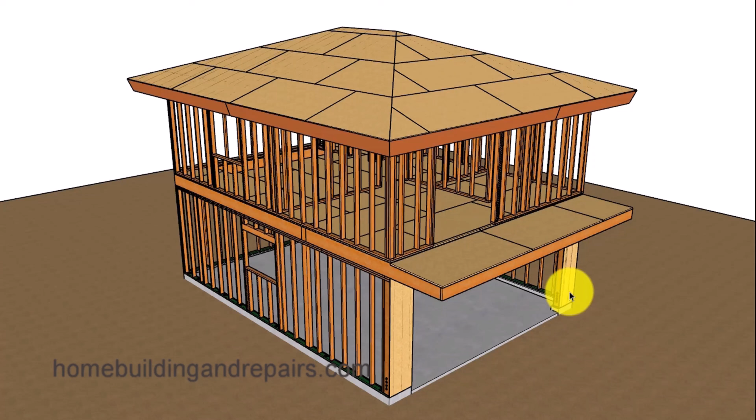I'm also going to provide a couple of examples for installing shear walls. That would be a common thing to do on the front of a garage, especially when you have a 20-foot wide building and a 16-foot garage door opening.

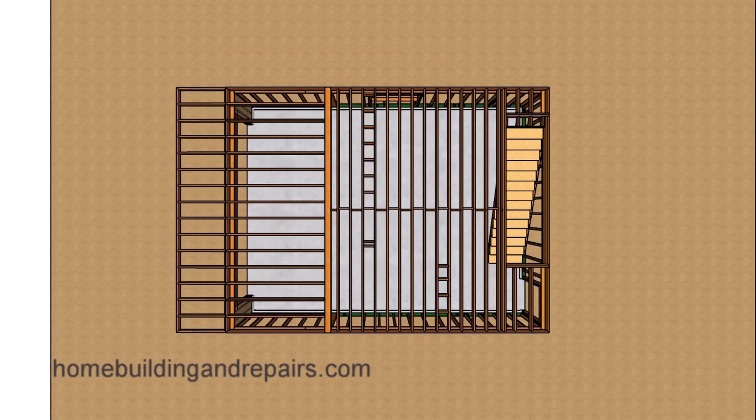Let's go ahead and quickly take this building apart. Get rid of the roof, ceiling joists, walls, floor sheathing, and then the joist, so that we can take a look at the foundation and get a better idea at how the structural shear panel will work.

In this video, I went ahead and widened the wall here to make it a 2x6 wall so that I could install some 4x6 on each side, along with some large hold downs.

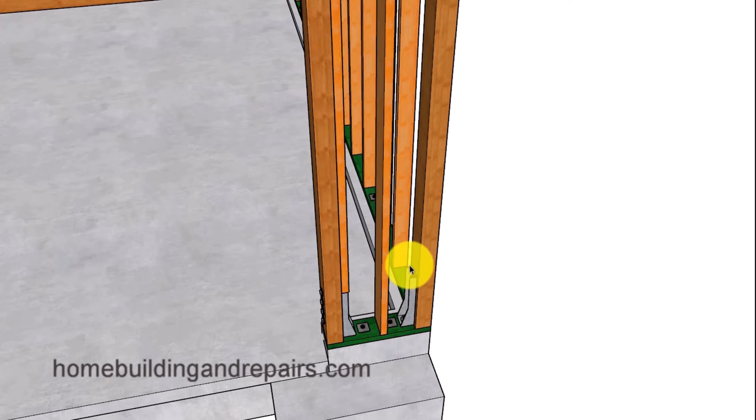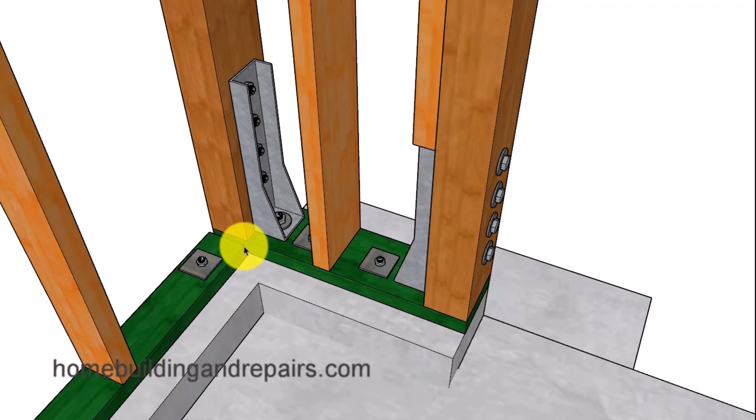I'm going to provide you with two different methods here for building the shear wall. On the first one, I went ahead and cut the plate a little shorter so that I could install the shear panel and have it run through the framing like I've done here.

On the other side, I'm going to run this plate through, and you'll see that here in a few seconds. Let's go ahead and take a look at the hold downs and how they go into the concrete with some extremely large anchor bolts there.

I know some of you are thinking, why do we need 2 anchor bolts here when we have the hold downs here? And I got you, but the anchor bolts are usually going to be required, even though they might not make any sense.

Here you can see where I stopped the framing plate and then ran this plate through and installed the 4x6 on top of this framing plate in this wall.

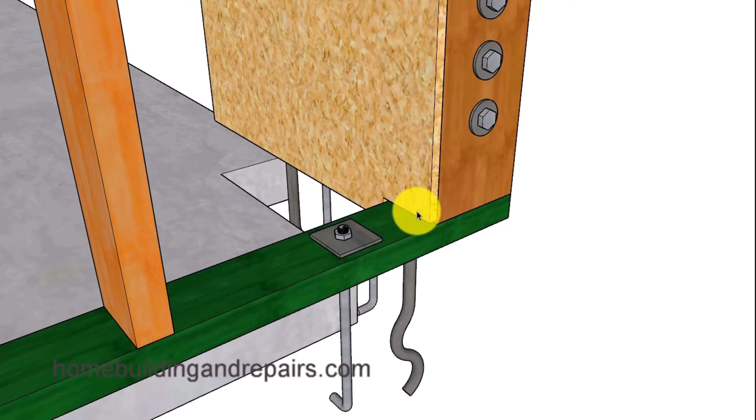If you're wondering which one is going to be better, I don't really think it's going to matter either way. However, if you have to notch around it, then you might not be getting the nailing you need into the bottom plate like we have in the other example.

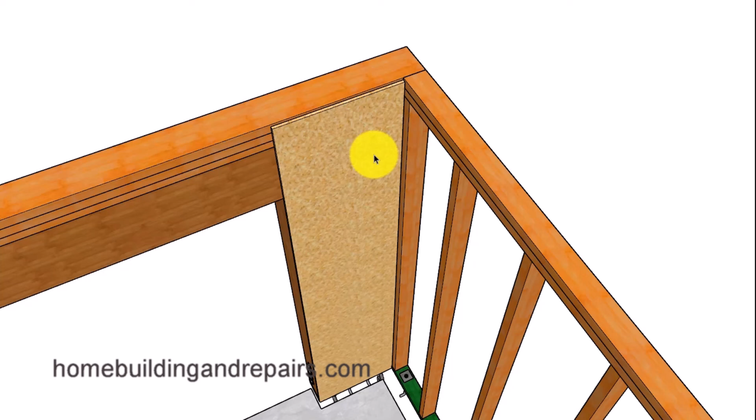Of course, you can install the shear panel and the framing stud over the shear panel. I would strongly suggest avoiding installing both pieces of shear panel on each side of the wall until after you've got your framing inspection.

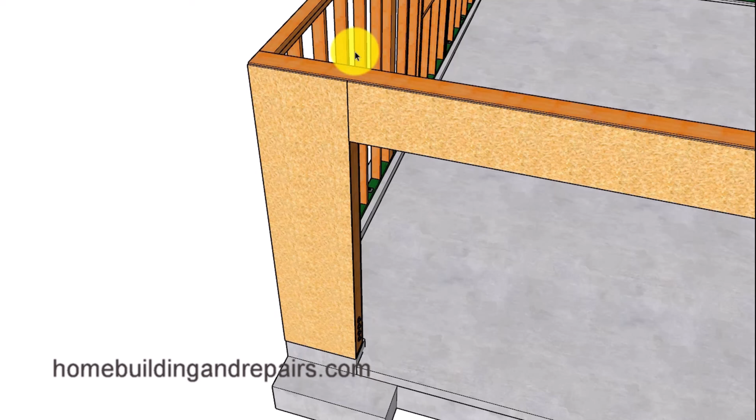The reasoning for that is the inspector will need to look at the hold downs. And if the garage needs to be insulated, then the inspector will need to see the insulation also.

Next up, we went ahead and added a couple of larger footings for the front wall to support the floor framing weight of the balcony.

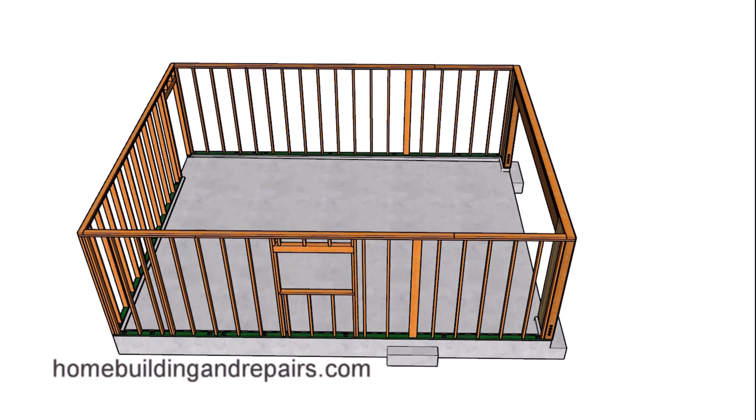Of course, we needed to add 2 more footings on this side here because we're going to be installing a beam here. So let's go ahead and take a look at what we now need to do to the floor framing.

That's going to look something like this: a large beam going across, supported by a post on each side, and then transferring the weight from above down to the footings, along with switching the direction of the floor joist, and then shaping the front of it so that we will have a slope on the exterior to drain off any water that could accumulate here.

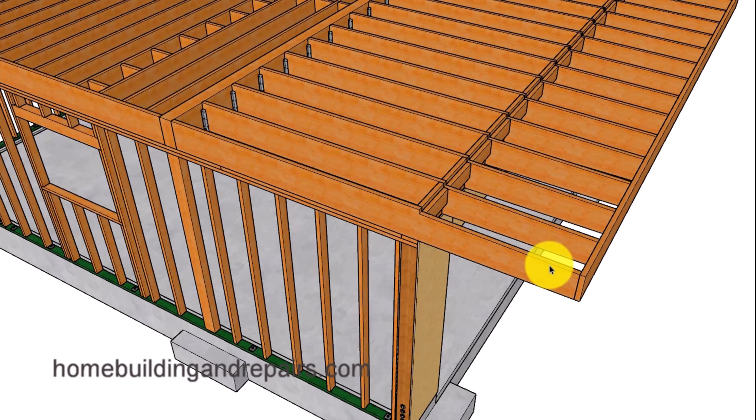And the slope will be about 1/4 inch per foot.

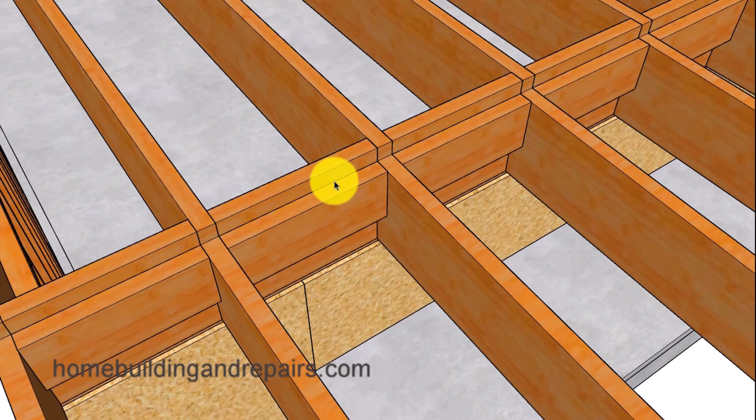We will need to install blocking in between the floor joists that will sit on top of the wall framing, along with some blocks that will provide us with perimeter nailing for the deck sheathing. Here's another view of the blocks.

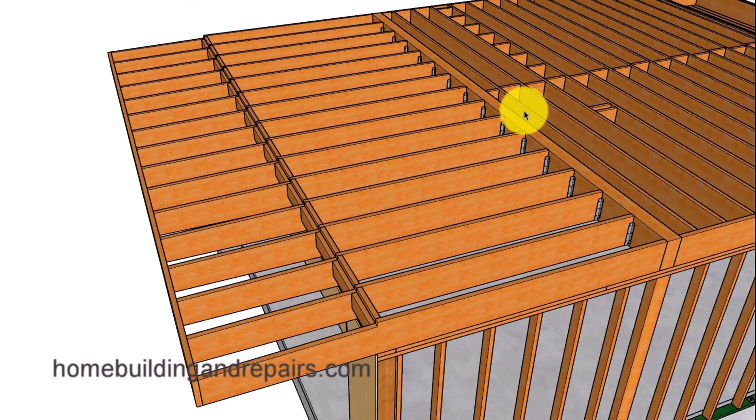Let's pan out to take a look at our double row of blocks along with our hangers. Something I noticed here is that I didn't install any blocks like I did over here underneath one wall that's going to be running in this direction. Keep in mind to install a double joist or blocking like we did in the floor for any walls running parallel to the floor joists in your floor framing.

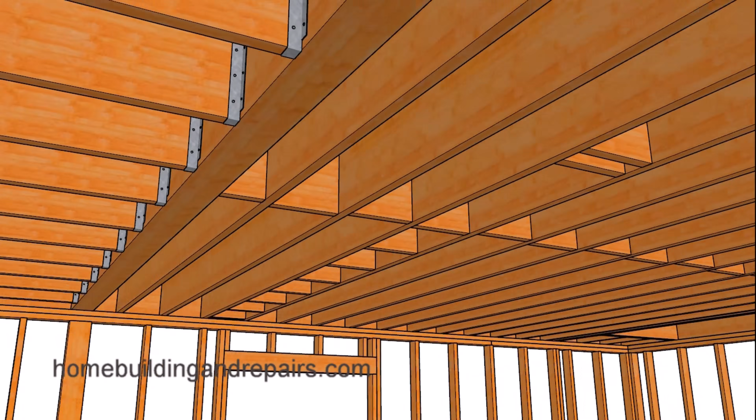Here's another view of the bottom with our beams sitting on top of the post and our shear panel. If you're going to be drywalling this area, make sure you add some type of furring strips to create a nice flat wall.

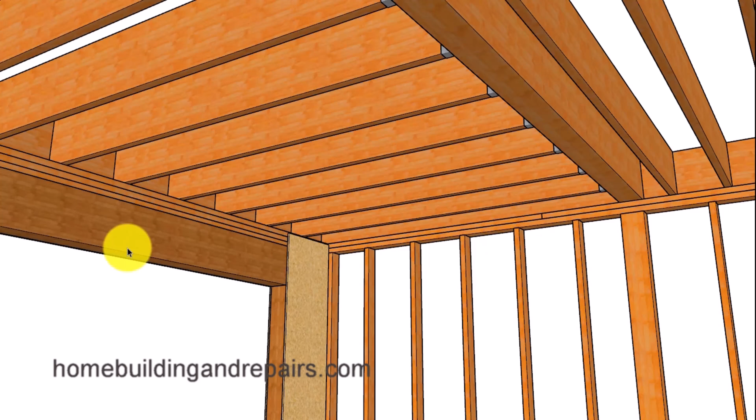Next, let's install our floor sheathing to provide you with a view of the drop down here. Ours is going to be about 1.5 inches. We have 1 1/8 inch sheathing on the balcony and on the floor. You can always use smaller sheathing.

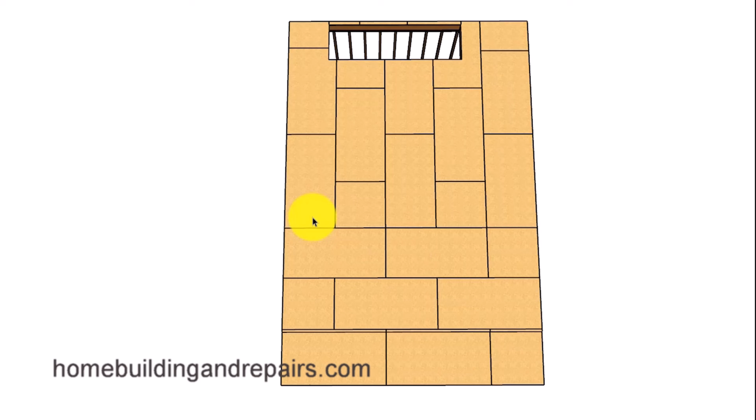Of course, the floor sheathing will need to switch directions in this area and over the balcony so that it's installed perpendicular to the joists. Here are the blocks I was talking about that probably need to be installed over here, and you can get a better view of that right here. Here's the wall I'm talking about that might need some blocks underneath it like we have over here to support this wall.

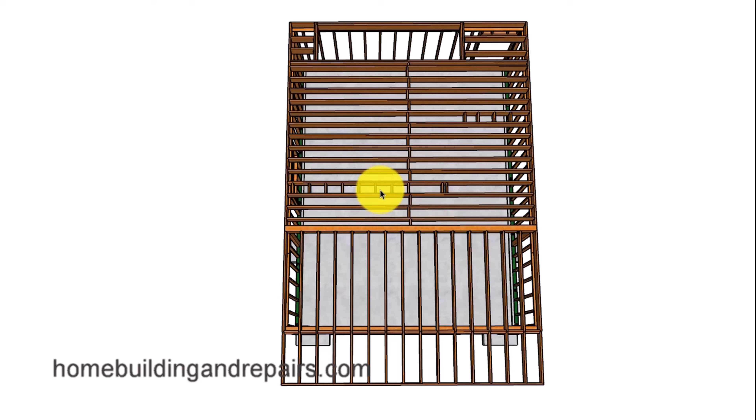With our second floor sheathing, let's provide you with another view of how we're going to have a step down here. This step down usually provides a nice way to waterproof and separate the balcony deck from the floor. I believe I have other videos on that already made.

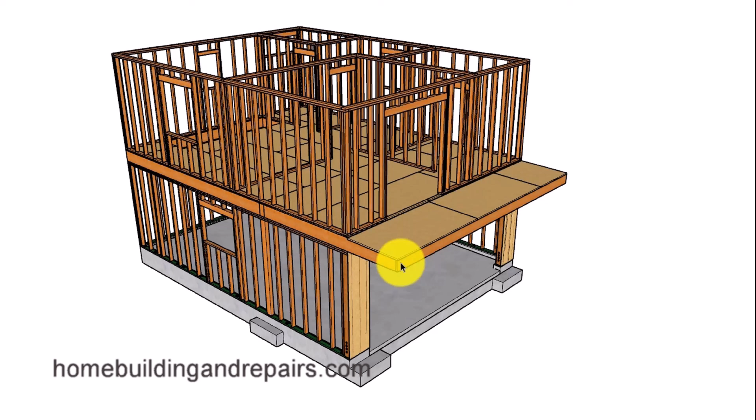Our balcony is going to be sticking out 4 feet, and then we're going to go back 8 feet to provide us with a 1/3 cantilever. However, keep in mind that I have seen building codes requiring 1/4, which means if I was going to have 4 feet here, I would need to go back 12 feet and use 16-foot long joists.

If our ceiling joist looks complicated, that's because of our hip roof. If you watch some of our other videos, you might have noticed where I used pressure blocks instead of joist hangers. Since the span here isn't very long, we can use 2x4s and butt them into a double 2x6, and then we need to notch underneath the hip rafter.

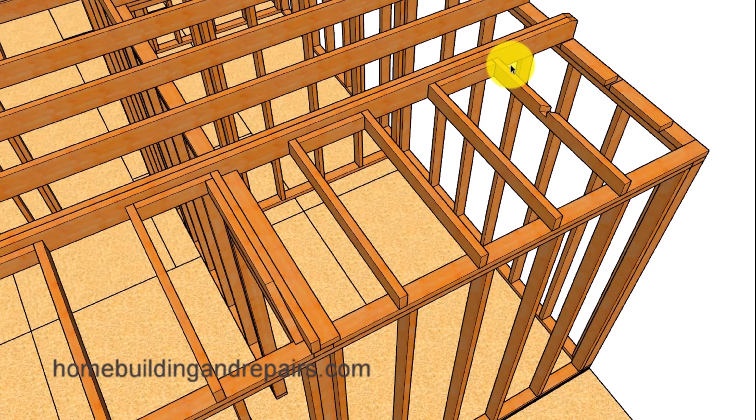In this video, I'm going to be using a 2x10 hip and 2x6 rafters. However, you might be better off using double 2x8s for your hip, or even a 4x8. If you remember in one of the other videos, I suggested installing a beam here to reduce the span for the ceiling joist so we could use smaller lumber.

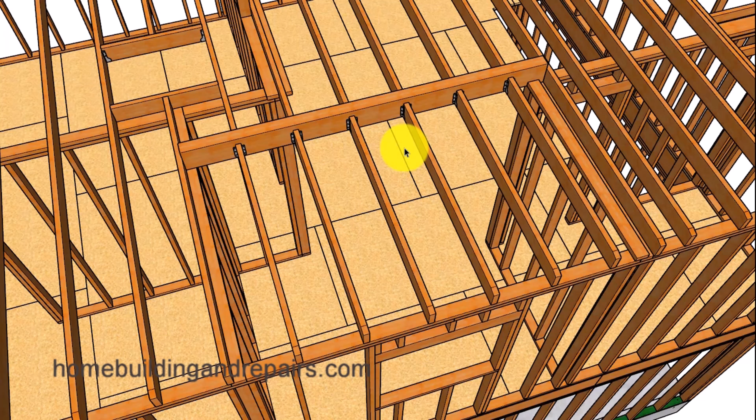We're using 2x6 here. However, on the longer spans, you might need to use 2x8 or even 2x10s.

One of our viewers suggested putting the crawl space access hole in the closet here, and that would have worked on that particular video. However, if I put the crawl space in here, I might not have the required minimum distance to access the attic, so I went ahead and moved it into the bedroom.

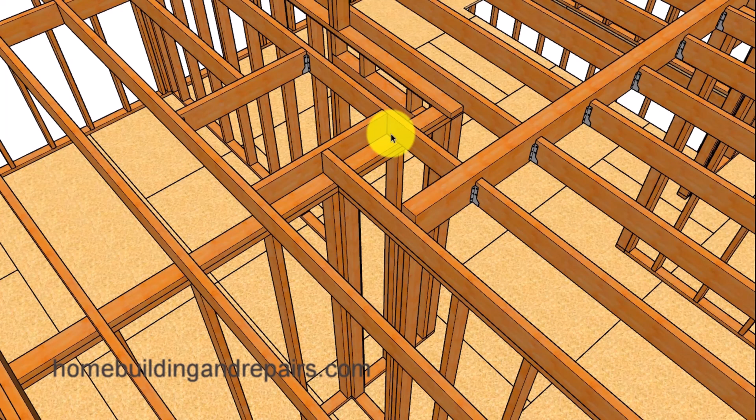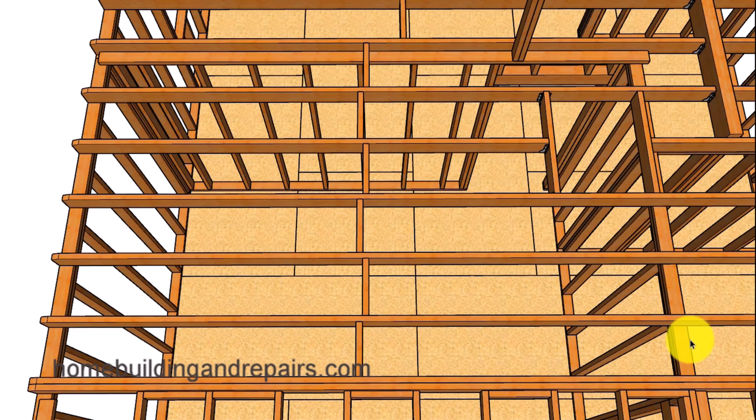Like I said earlier, if I was using a different roof pitch, something a little steeper, then I could put the crawl space in the closets and keep it out of the bedroom here. And let's not forget, if I was going to move the access into the closet, I might need to move it further away to allow for the shelving in here, or reduce the length of the shelving, which again creates design problems you might not want to deal with.

Next, let's go ahead and install mid-span blocks in the ceiling joists. We could always install blocks over all of the wall framing to provide us with a sturdier ceiling.

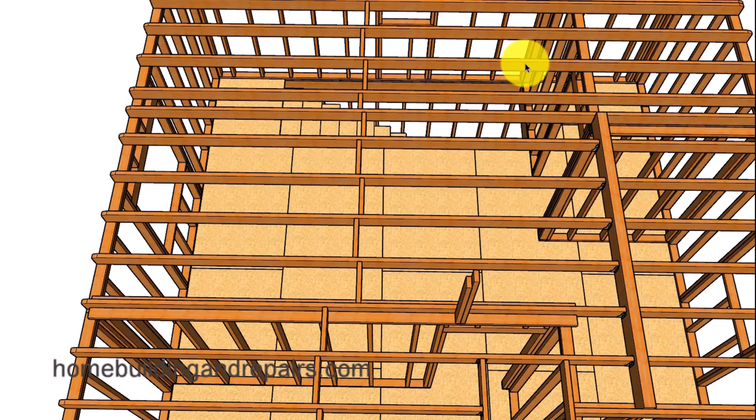I moved the blocks over a little bit to install them in the center of the distance in this section of the ceiling. The beam will be sitting on top of the corner of this wall and then on top of the closet wall, the wall that will divide the closet from the kitchen. On all 4 corners, we're going to be notching this ceiling joist for the hip. And let's not forget all of our ceiling backing for the drywall.

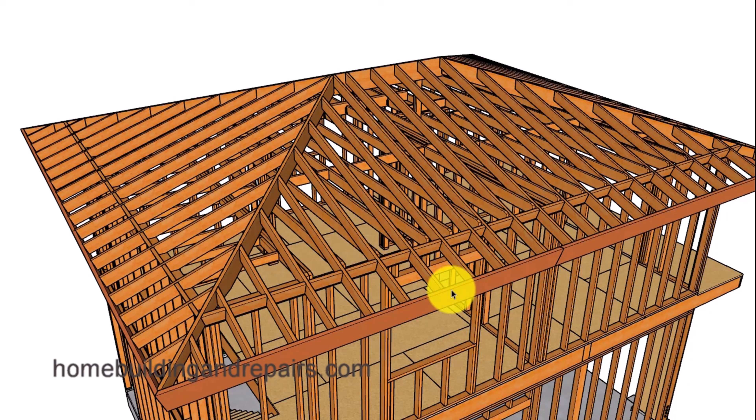Let's pan out there. Next up, let's go ahead and install our hip roof. Again, 2x10 hips, 2x6 roof rafters, and 2x8 fascia board, with a roof pitch of 4 and 12, or about 18.5 degrees.

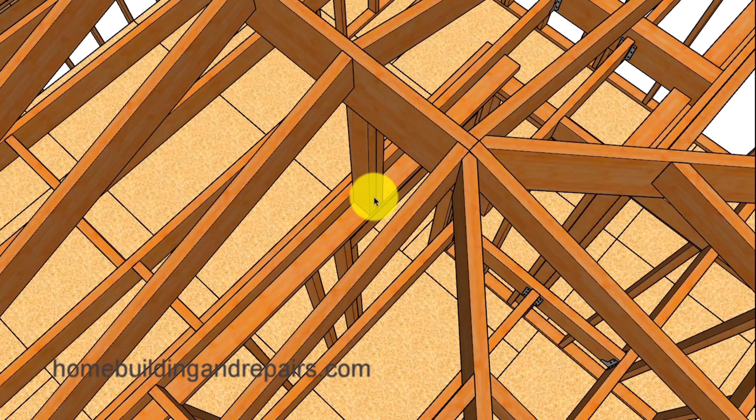This is about the only spot I can install some type of support underneath the ridge, even though I could come off of this wall and add supports for these 2 hips. However, it's not going to be as easy on the other side. You might want to install a larger door header here, and this gives you a better view of how this support is encroaching on the area over the door opening. Something to think about.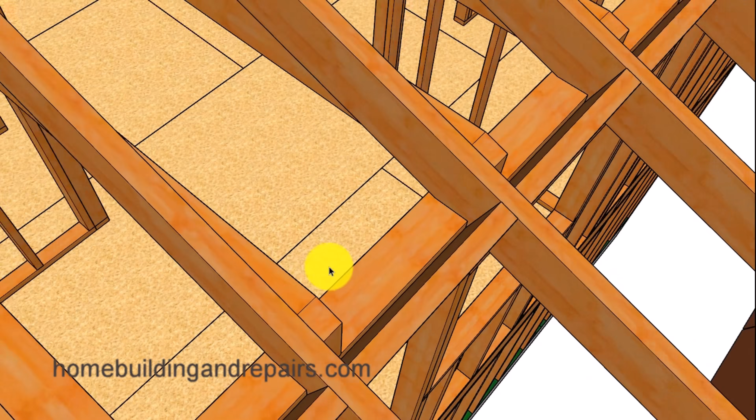Now take a look at how our seat cuts and our blocking will be working. Along with the ceiling joist, we're going to need to notch the top of the ceiling joist, since we're using 2x6 for our rafters and for our joists. You wouldn't need to do this if you were using 2x8 for your roof rafters, and the slope of the roof could also affect that.

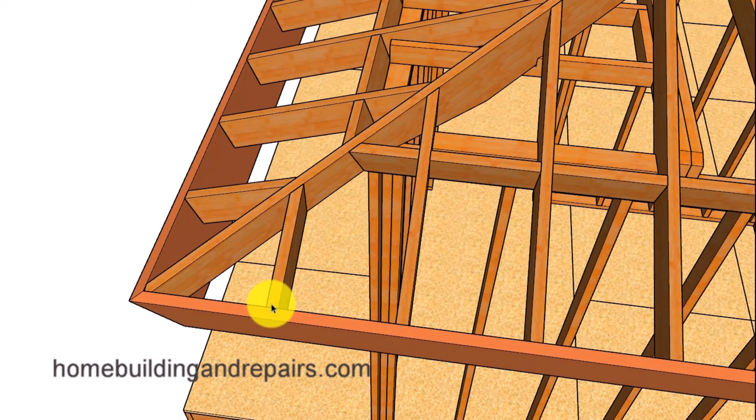On our hip roof, we are going to have a couple of rafters here. You might be thinking, what are these guys doing here? They're basically just providing a little more support for the roof sheathing and to continue with our 16-inch on center layout. We will need to cut some funky blocks here in the corner.

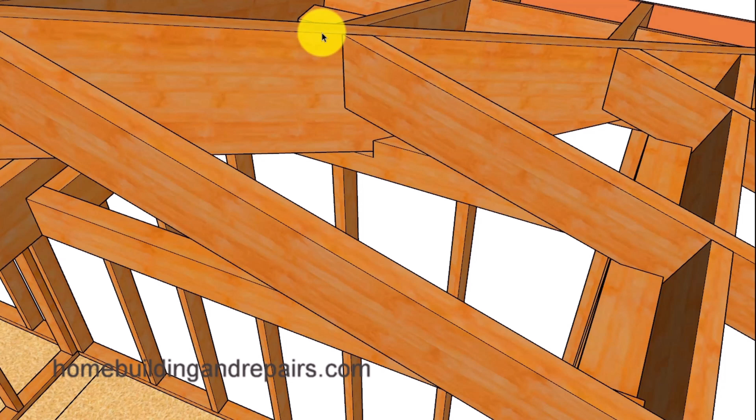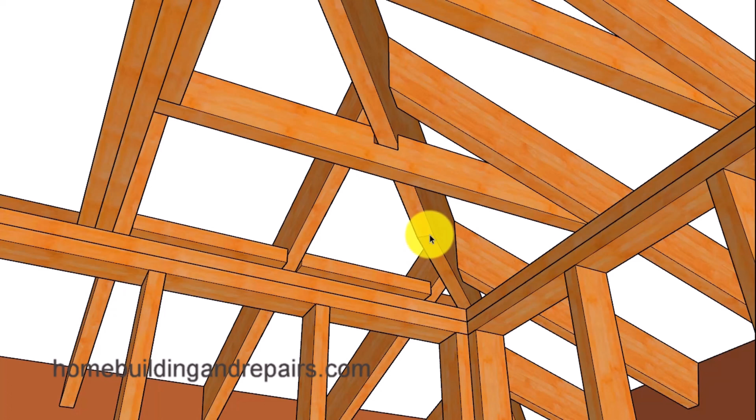Now let's go ahead and take a look at a view from the other side, and a view of why we needed to notch the joist here. You might not need to notch the joist if you're going to use smaller hip rafters. For those wondering why I didn't use smaller hip rafters, that's because I've already made plenty of videos like that. However, I haven't made one like this to show you how much area here will not be supported, suggesting that a 2x12 might be out of the question.

A view of our corner drywall blocks. These blocks will be used to provide nailing for the ceiling drywall.

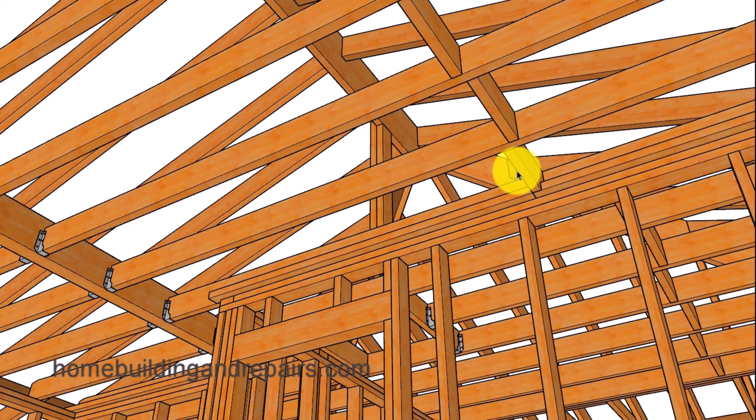Next up, let's pan out and take a view of the ceiling from what it might look like from below. Again, this gives us a view of the backing for the drywall, along with our ridge support and our blocking that might need to be notched over the drywall backing.

All four corners of this building will be framed the same way, or should I say framed the same way with very little modifications. Here's a view of the hip and how it planes into the ridge and the roof rafters, which are spaced 16 inches on center in both directions.

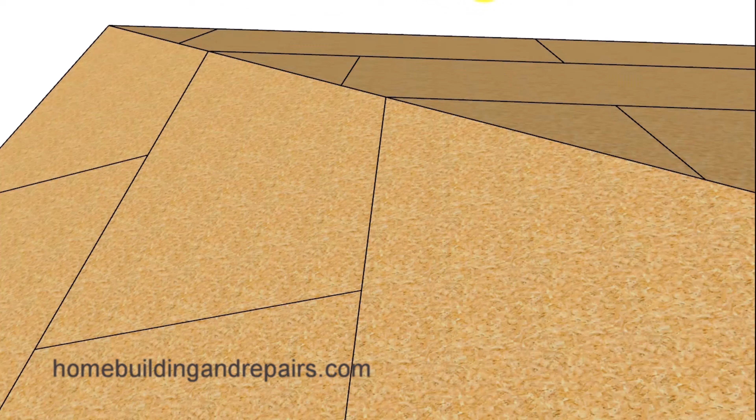Next up, let's go ahead and install our roof sheathing and start wrapping this video up. Let's not forget that some engineers require a 24-inch minimum in both directions for your roof sheathing. If that's the case, you're going to need to spend a few more dollars to modify this area here. So again, another thing to consider if you're going to be building a project like this.

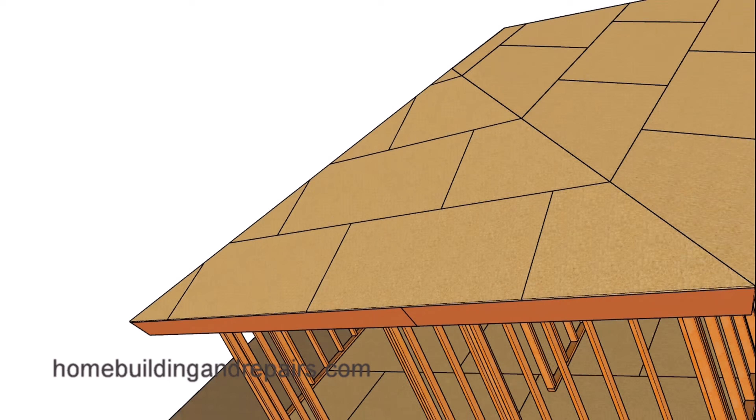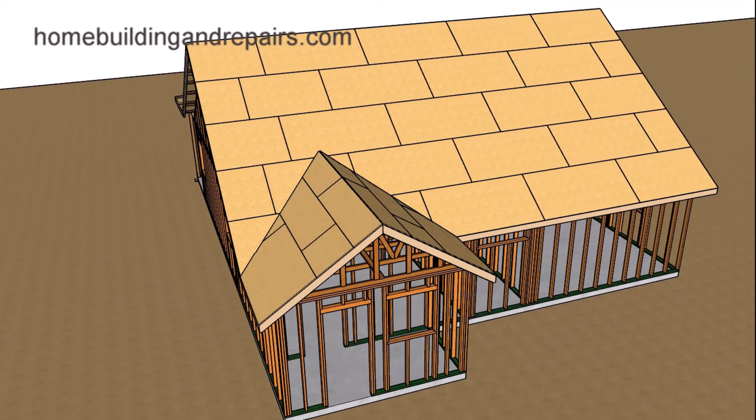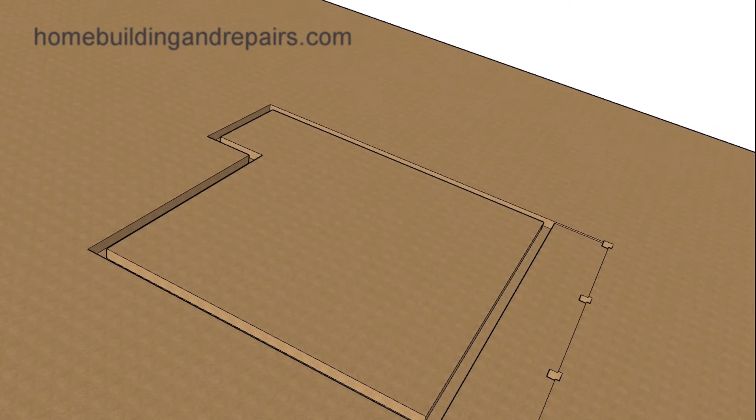Next up, let's take a look at another house with a long front porch and a rear laundry room with a gable roof. I believe it has about an 8 in 12 roof pitch with a fairly straightforward building foundation. I'm not going to put any rebar in here, and I'm also not going to spend a lot of time on certain parts of the construction, including the building foundation. So you can see here where we have the concrete slab and the porch slab with the footings.

So here we have a single-story house, a living room, kitchen, laundry room in the back, one bathroom, and two bedrooms with a closet located in the hallway and a closet in each bedroom.

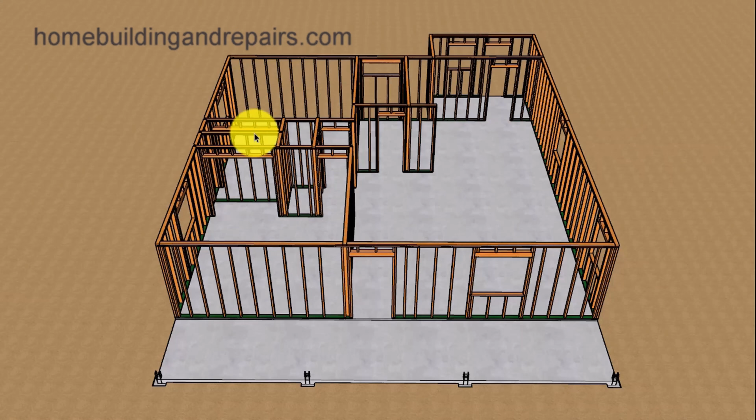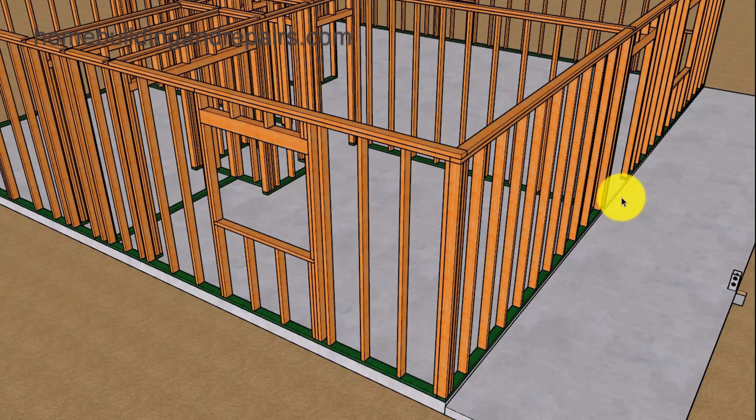So let's take a look at the front here where we have a window and an entrance door along with a 2-inch step down between the top of the interior foundation and our porch. 2 inches is a common measurement, even though I'm starting to see building codes suggesting this needs to be a little smaller. I actually noticed that on one of the videos I did for a stair landing.

Next up, since we are going to have a truss roof, you might need to install 1x4s here instead of 2x4s for your top plates. I've been getting a lot of flak for this - some people are saying, oh, I don't do that. Well, I've never come across a project where we didn't do it. So make sure you check with the truss manufacturer, because I'm not suggesting this is the only way to build this, but I am suggesting it's the only way I have ever done it.

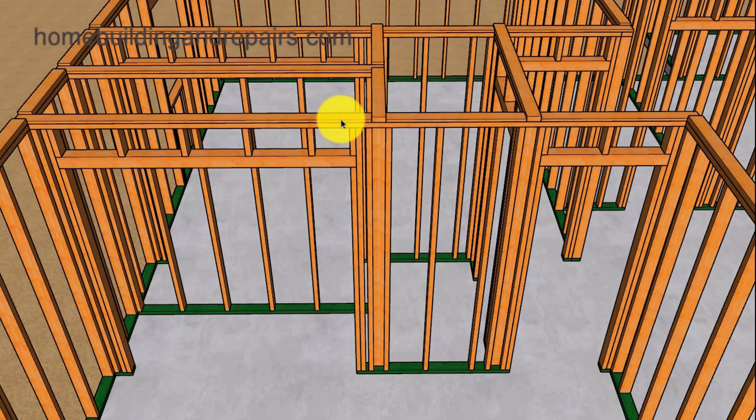And the reason for doing this is to provide a little bit of leeway just in case the truss roof needs to settle down a little bit lower than what would be provided if we used a 2x4.

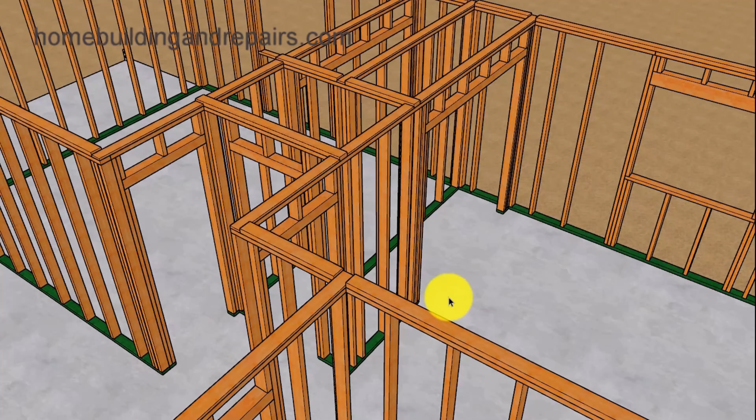Next up, we have a bedroom closet, and then our bathroom door, along with a bedroom door, closet door, and another bedroom door over here. Another view of it there, along with our closet in the other bedroom. And then another area here that could actually be used for a forced air heating and cooling unit if needed.

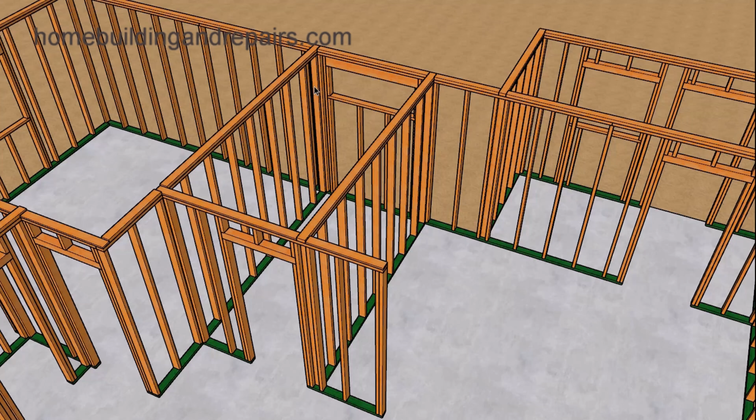Bathroom with a window that's high enough to be placed over our bathtub and shower combination unit. Another thing that you don't want to forget about.

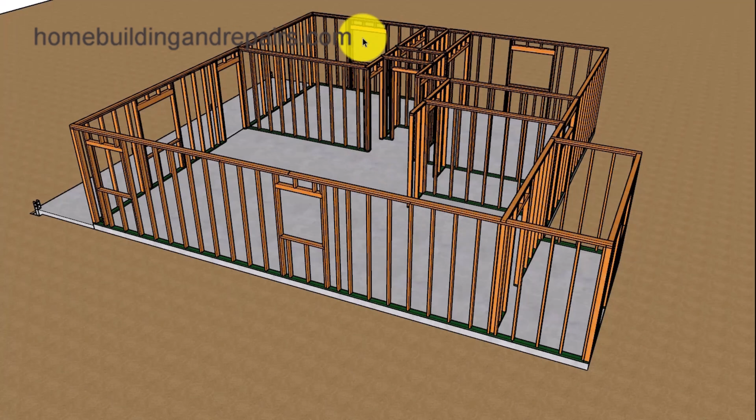Next up, let's pan out a little bit and take a look at the laundry room, back door to the house, and of course this could be a door or an opening going into the laundry room. It's not uncommon to see a door here that closes so it can reduce any unwanted noise coming out of the laundry room and going through the house. And a couple of windows and an upper view.

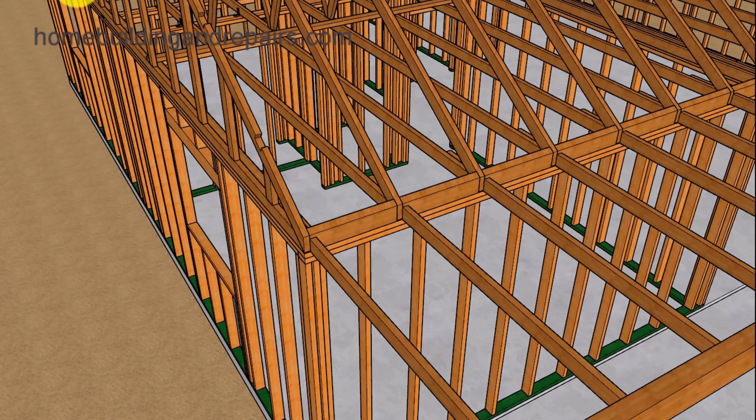Next up, let's go ahead and install our trusses. Now, we're not going to install the porch roof yet or the back roof, or should I say we're not going to connect it to the building yet until after we have installed our trusses. You can see here where the ceiling on the porch will be lapping through - it will be tying into and connecting to each one of the roof trusses to provide us with a nice structural tie running all the way through to the front of the building.

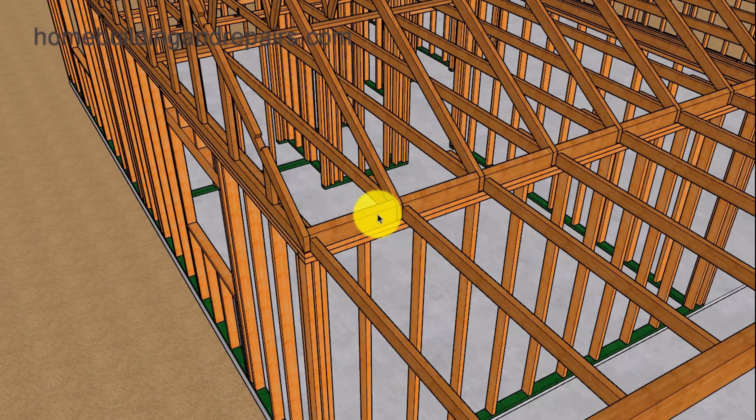Now keep in mind that in our example, our trusses and our ceiling joists are spaced 24 inches on center, and if for whatever reason you need to shorten the spacing, then you can do that. Our porch beams, along with our posts, sitting on top of our base connectors and our concrete footings.

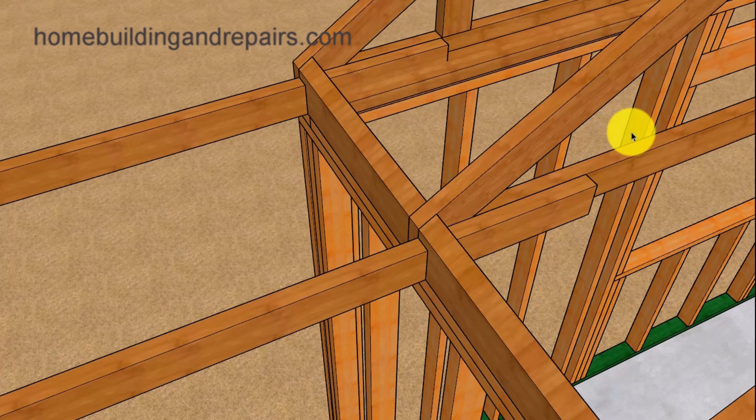Next up, let's take a look at the shaped blocks so that we can get some good roof sheathing nailing. I would imagine at least 6 16D nails, if not a few more, to create a nice connection here between the bottom chord on the roof truss and the ceiling joist.

Another view of it there. Let's go ahead and take a look at our pressure blocks, and you might need to use joist hangers here. However, I have been providing viewers with something that you might be able to use to save a few dollars, especially if you end up with some scrap lumber that you might not be using.

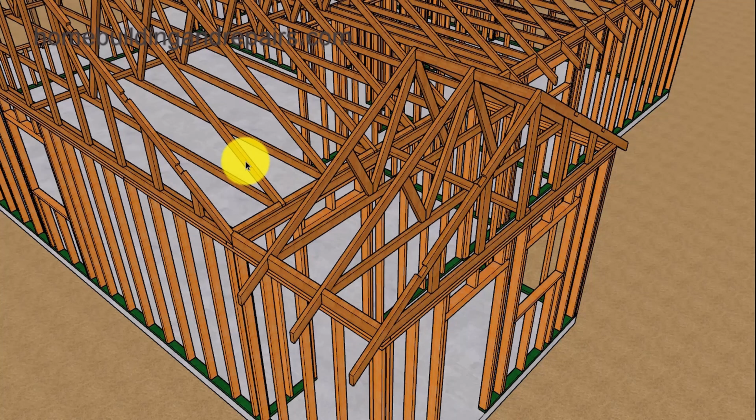And of course, you can install the rear gable trusses. Just don't install anything more until you have installed the roof sheathing and nailed it. Then we can go ahead and add our fill section later. And you don't have to build it in the order that I am providing you with. Just don't forget some of the information I have provided, because the last thing I want is for you to make a mistake that's going to cost you money.

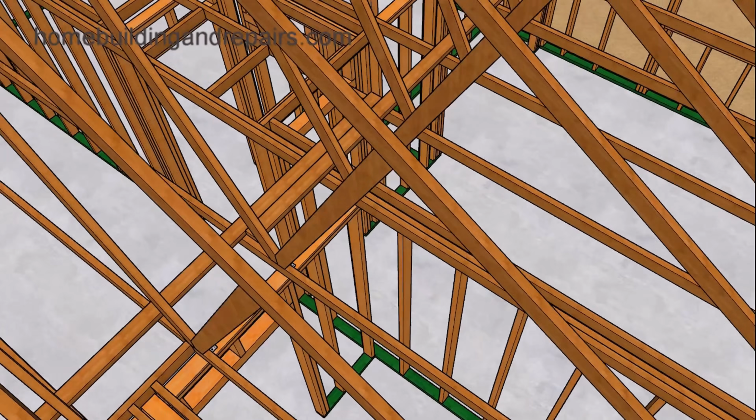And of course, you will need to install ceiling backing for the drywall, and that can be done a variety of different ways, along with an access hole into the attic. In a project like this, you might be able to make the access hole a little larger so that you can install a heating and cooling system in the attic. Another thing you'll definitely want to work out during the design phase.

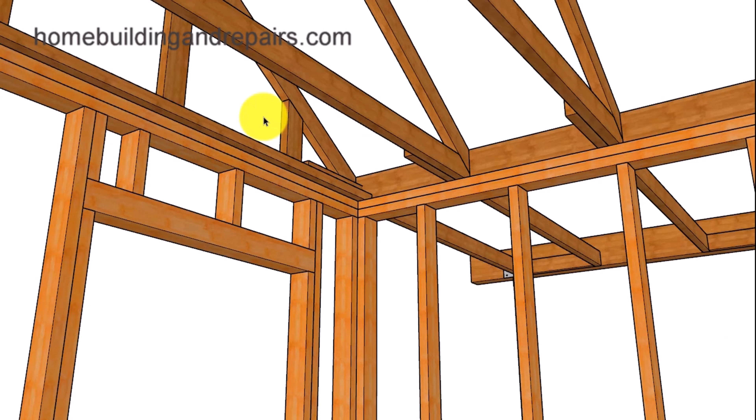And of course, more backing here. We just nailed that backing to the truss. And this piece of backing was nailed flat onto the top of the framing plate, again providing you with another option to think about when building or designing your house.

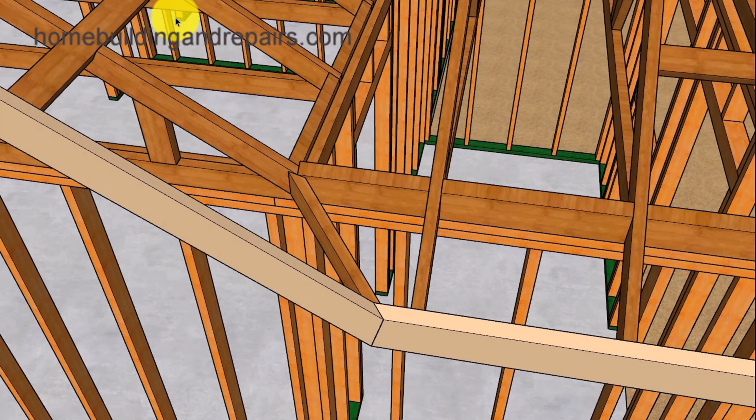Next up, let's go ahead and install our fascia board, including all of the valley fill blocks like we have here. Definitely going to need one on each side, one over here. The fascia board here is going to be plumb, or vertically level, not square off of the rafters. After we've done that, we can go ahead and install our roof sheathing.

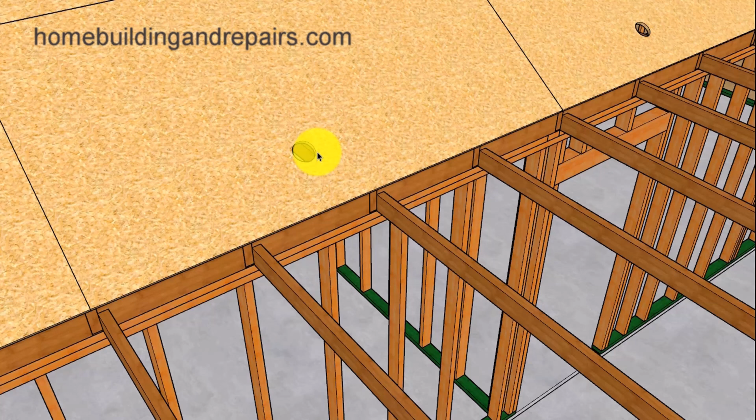For those of you paying attention, you can see where we have some ventilation holes here, and you might need to install a few more. They might need to be larger, or you might be able to make smaller ones and maybe more of them. But the last thing you want to do is cut a large hole and affect the integrity of the roof sheathing or the structural integrity. So let's not get carried away here. Another thing your structural engineer can specify on the building plans if they haven't already.

Next up, let's go ahead and install our patio or porch roof. You can see why we needed to wait until we installed the roof sheathing. Not too difficult. Next up, let's install our fascia board around the porch, and then our roof sheathing.

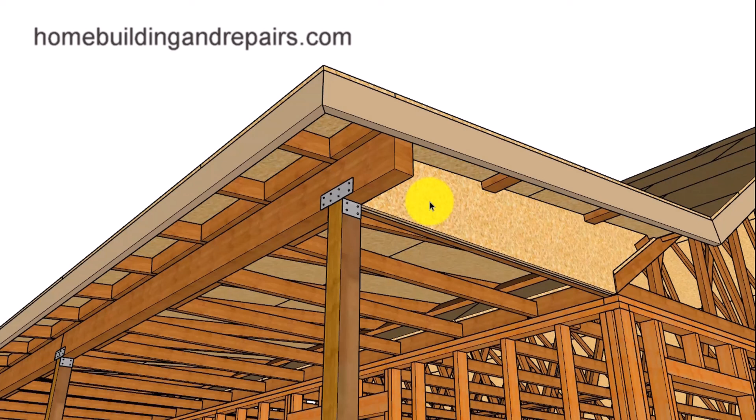Then let's take a look at the side here. I needed to rebuild this area a little different to get everything to work out how I wanted it to. However, your project might not require this type of design at the end of the porch.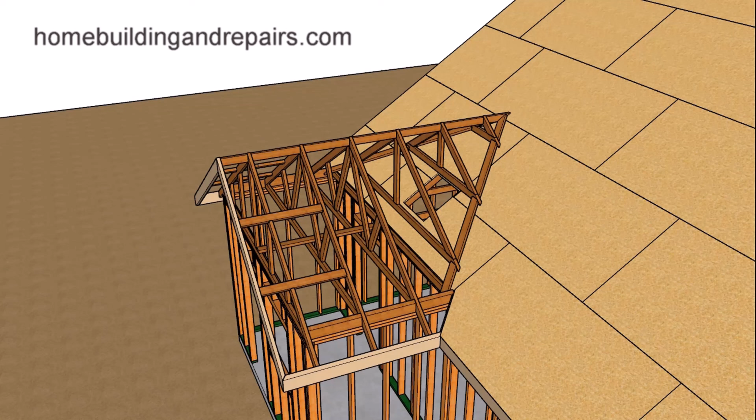Next up, let's go ahead and install the fill. You can see here where the truss company has provided us with roof trusses so that we don't need to make our own fill, and hopefully the fill rafters work. I say hopefully because most of the time they didn't when I worked years ago. Then we'll go ahead and install the roof sheathing, and we are done with this project.

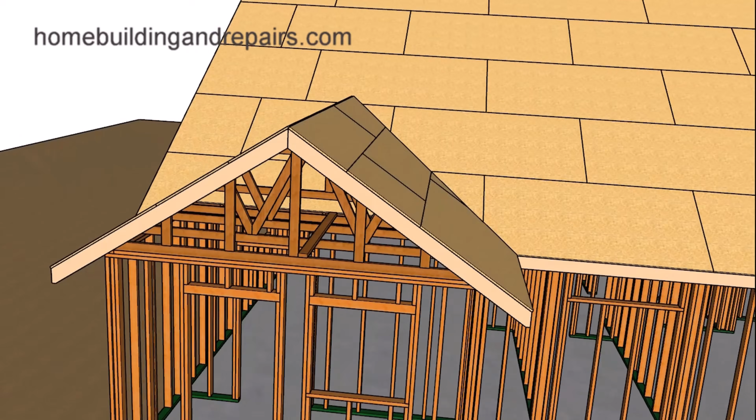So there you have two homes that might give you some ideas for building your own home.